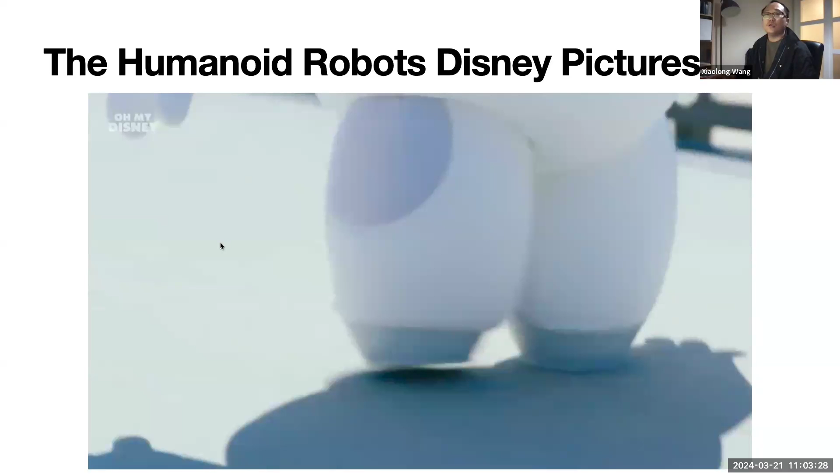I am not a licensed crossing guard, but it is safe to cross. So famous. How did you find me? Probably many years now ago. You hide, I will seek. You also see the movie. It is important to stretch. Before physical activity, I suggest you start with a quick jog.

Let's go. I think as I'm working on these robots, it's really important to have a cute robot, right? Fundamentally, I feel like eventually, if you want to deploy a humanoid robot in society, the biggest obstacle is not really about the techniques. Actually, it's about whether people find it creepy or not. For general people to accept humanoid robots, and for a humanoid robot to basically interact with humans safely and in a friendly way, that's actually a very important aspect.

But looking into what we're emphasizing nowadays, when we try to do humanoids, we have a lot of startups now. For example, the infamous figure startup raised $700 million. If you raise $700 million, it seems it's going to be very serious, and it's doing a lot of serious tasks and doing very well. So this is some upper body control.

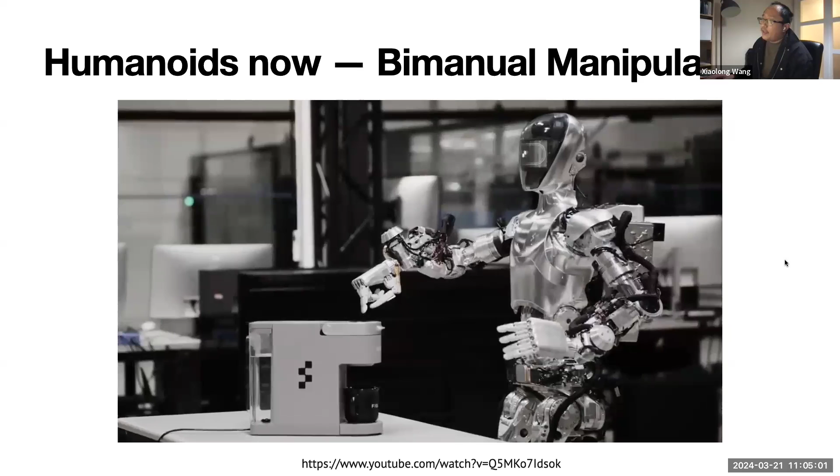And then we have also a lot of work. It has been a long time that people work on bipedal walking, right? So robot running - this is I think Zhongyu's recent work, like running at Berkeley.

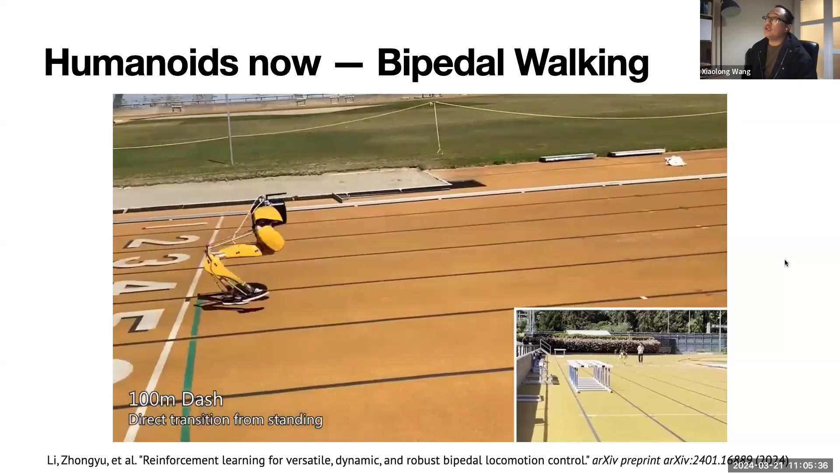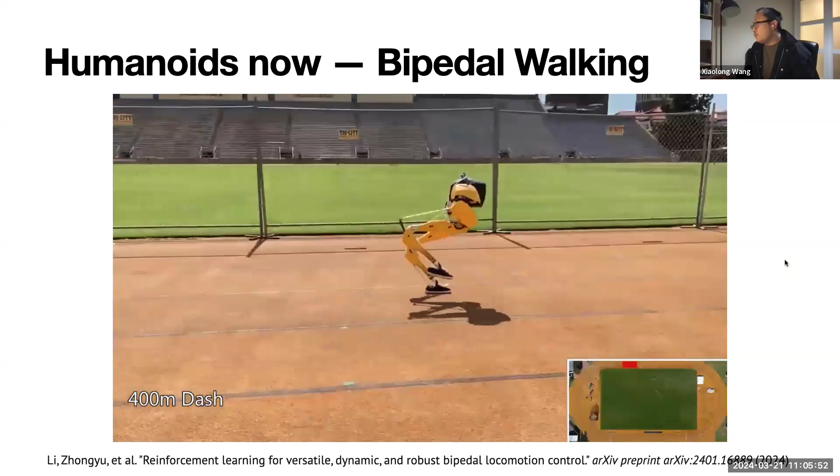So both sides, walking and bimanual manipulation, there's a lot of basically important work. But what we really want to have is maybe eventually a robot that works together with humans. So you need to move and also manipulate with hands, and upper body and lower body need to do things at the same time. So essentially, what this is called is basically whole body control.

I think these are basically the three topics I try to cover today. The first one is whole body control. And our way to do whole body control is not actually emphasizing specifically solving tasks. Instead, we are more focusing on how the robot can express itself. That's why we call it expressive whole body control.

So it would be something that looks like this, right? You have a human that can interact and dance with the robot. This is in our school.

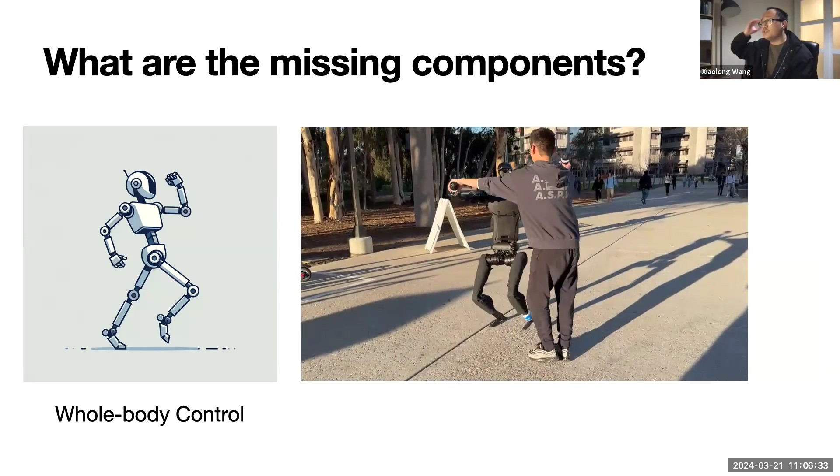Essentially, this work I try to look into is because whenever you have a roboticist and they ask the roboticist to create a robot, the first order is like this robot needs to solve some tasks. But how about can we have a robot that can be friendly and interact with humans, that can express its intention and feelings? This aspect actually has never been considered. So for this work, we basically try to look into a little bit of how the robot can coexist with humans. This is something we are looking into.

And then there's a lot of other technical parts, right? If the robot goes out into the world, you need to perceive the world, and you also need to have touch. So specifically, I would talk about two works. One is how to build good semantic and geometry representations for robots to do mobile manipulation. And then I'm also going to talk a little bit about hands. Hands are something I have been working on for a very long time, maybe 4 years.

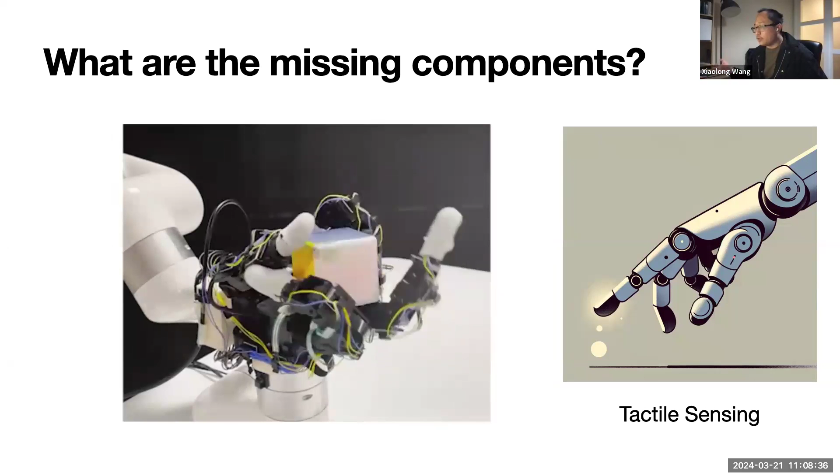It's a very interesting problem because it's essentially what distinguishes humans from animals. I would think that's the biggest difference—whether you know how to use your hands is basically how we are different from animals. And essentially a very important sensor on the hands is tactile sensing. So I'm going to talk a little bit about our in-hand manipulation work, using tactile sensing by feeling the objects, and then we can use the hand to do a lot of cool stuff. That's something I'll try to cover today.

I'll start with whole body control. Like I mentioned before, it's called expressive whole body control because we're really doing something that isn't useful for solving some task per se. It's basically just trying to move like a human and have some fun with humans. So when you look into this work, don't take it too seriously about whether it can solve any problems—just look into it like having fun, like having the robot have fun with humans. Some of you might have seen this video, we posted it everywhere, so I'll show you again.

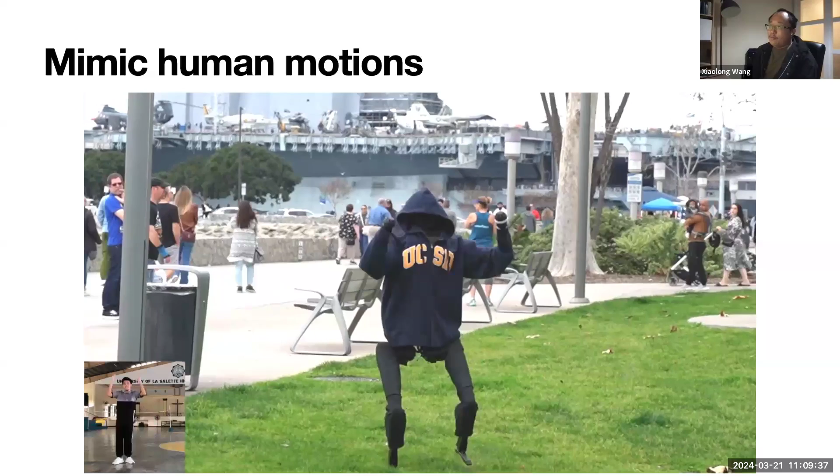Right, so it's following the human motion. But I think you need to wait till the end.

Right, so that's what happened in the end. There's still a lot of work to do, but roughly for 20 to 30 seconds we're able to follow the human's motion. In the end it drifts a little bit away, but it's fine—it's very robust, still walking, not falling down. But we did have a fall once, and it broke the motor, which took 5 days to fix. But this one is okay, it's safe. So the thing we try to do here is essentially enable the robot to follow humans' motion and do things like humans do.

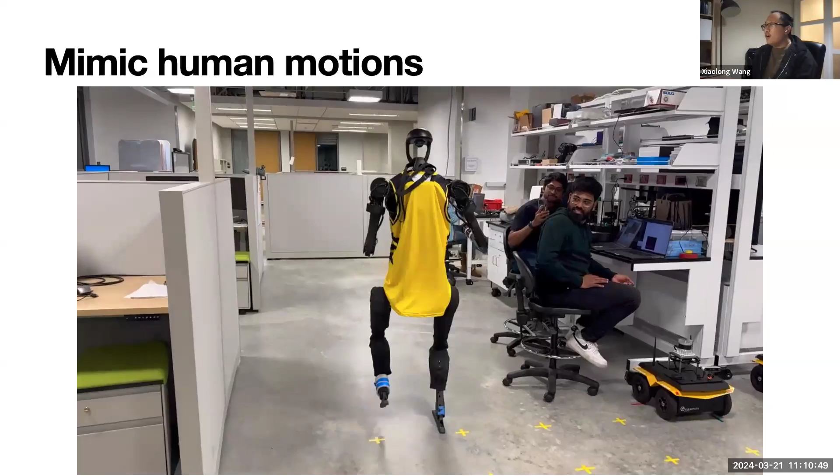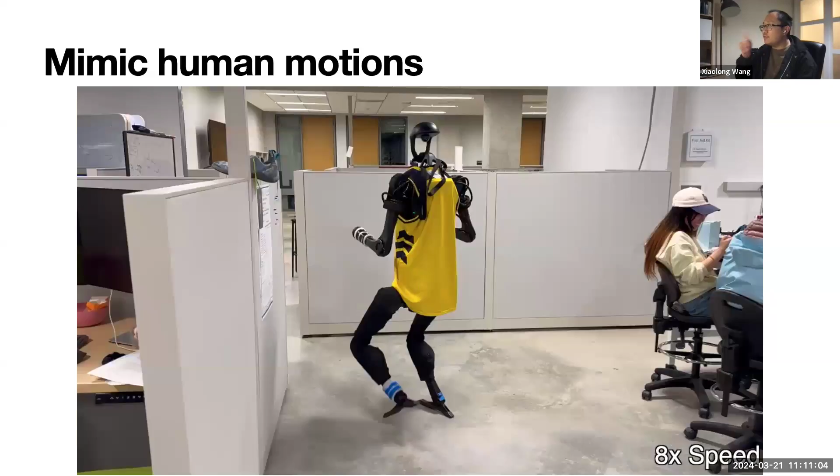So we have the robot that can basically hug you, and we also have the robot that walks around our lab to check if everyone is working. This is the collaborative office at UCSD. We have 7 faculty here, and students are sitting in here. So it's checking if there's anyone—apparently, there's no one.

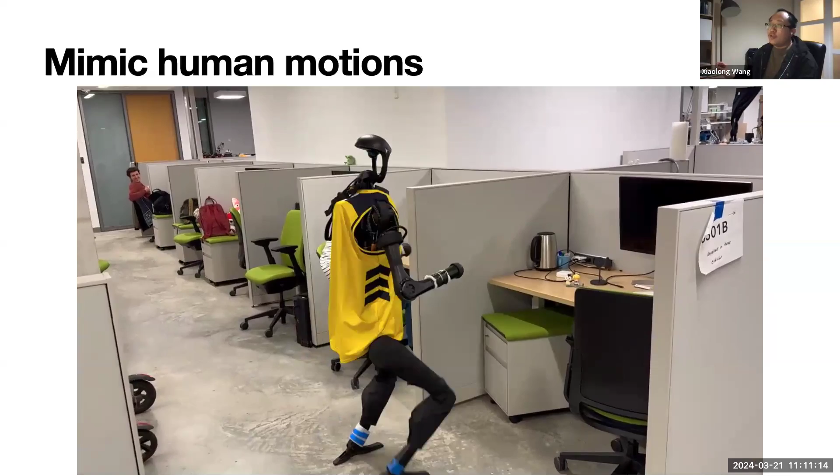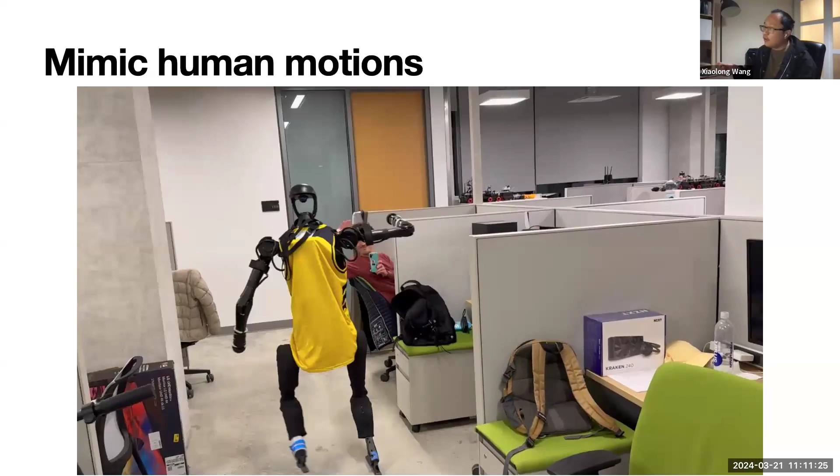So essentially, we do hope the robot has all this capability of waving hands, hugging people, dancing, and all these motions. That's something we enable the robot to do.

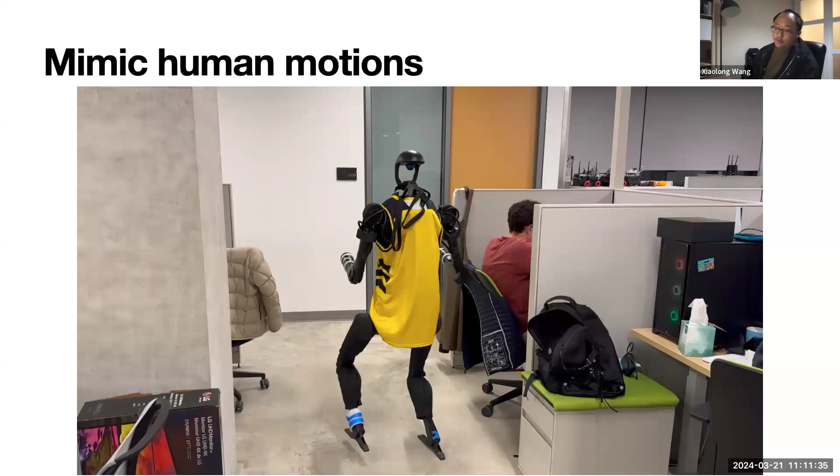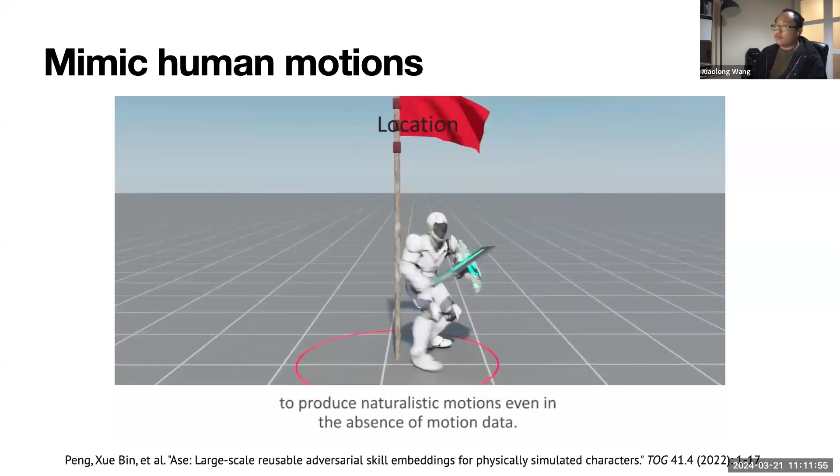So then, is this anything new? If you look into a lot of work like Jason did before—in graphics, in simulation, in all this community—if we play games on PS5, PS4, you already see a lot of very nicely animated robots and very cool robot motions in all these games. So why has it never ever been transferred to the real world? Why is this working so well in sim, but not really working in reality?

The major reason is basically, if you look into the Unitree robots, we spotted out the degree of freedom for each joint. One big reason is essentially that it has much smaller degree of freedom compared to the simulated robot. In simulation, this guy has like 69 degrees of freedom or something, but in our case, we only have 19 degrees of freedom. Currently the robot has this limitation, and it's a good thing or a bad thing at the same time—if you have high degree of freedom, it's hard to control; if you have low degree of freedom, then it's basically very hard to do sim-to-real transfer from the left to the right.

This is just a form of comparison on what we like the PHC and ASE. Pretty sure some of Jason's paper basically shows that the DOF is severely and largely larger than our robot. We are also training our model actually on many locomotion clips, not just a single one, to emphasize our policy is not overfitting to a single trajectory. We are actually training on many trajectories.

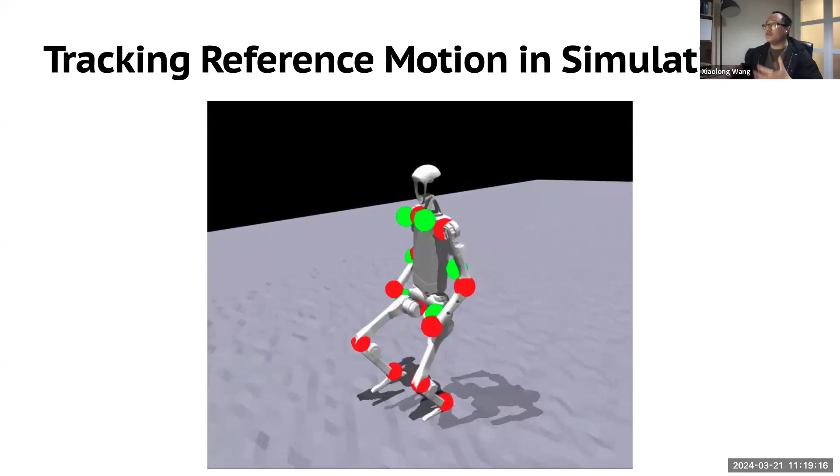So this is an example in simulation. The green dot is basically your reference motion, so this is like a fighting scene. We only do this motion imitation for upper body, so there's no green dot in the lower body. The red dot is basically what is actually happening, so you want the robot to track and follow the reference motions you're given. And that's transferred to the real robot.

So basically, so hitting this guy, there's a waving. This is another example, so you have this robot wave.

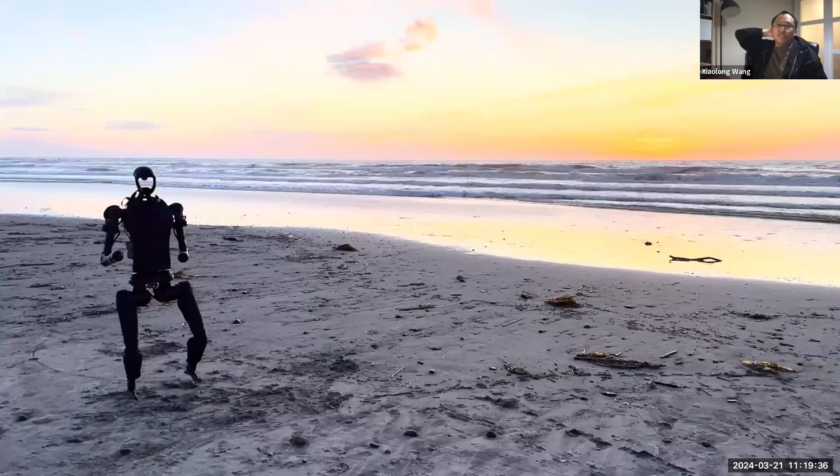And basically, this is what we shoot in the beach. It's important, because we are in San Diego, that the only advantage we have is the beach. So it's important when we have robot work, every work needs to have some demos on the beach. So that is very important.

So these are some examples basically showing the sim-to-real transfer, and you can see the motions basically imitate only the upper body, and the lower body is basically trying to maintain stable.

And there is one thing though, some might notice that it is stepping a lot because essentially the current design of the hardware is still, I feel like there's some non-perfect disadvantage. Basically there's only 1 degree of freedom on the feet. So if you look at your feet now, imagine if you only have 1 degree of freedom, you can only go up and down.

It's very hard to maintain balance when you're standing, but if you have 2 degrees of freedom, you can also do left and right. Just look at my feet now as well. Then basically, you can very easily stand still because you can move a little bit left and right, front and back.

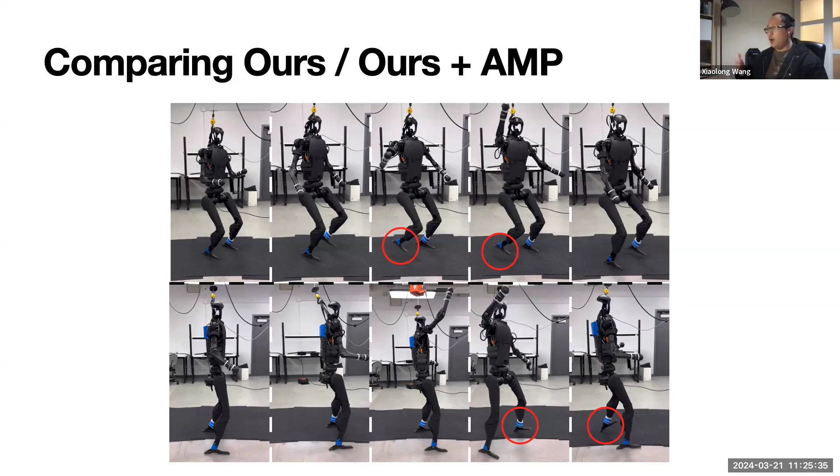So what we call is the foot clearance - whether the foot is lifting up from the floor above the floor some distance. What we find is if you do motion imitation and enforce the leg to also follow the motion, it's not easy - you have less foot clearance. In our case, if we just try to optimize for robust walking, we have better foot clearance, which means walking more stable and better without falling down.

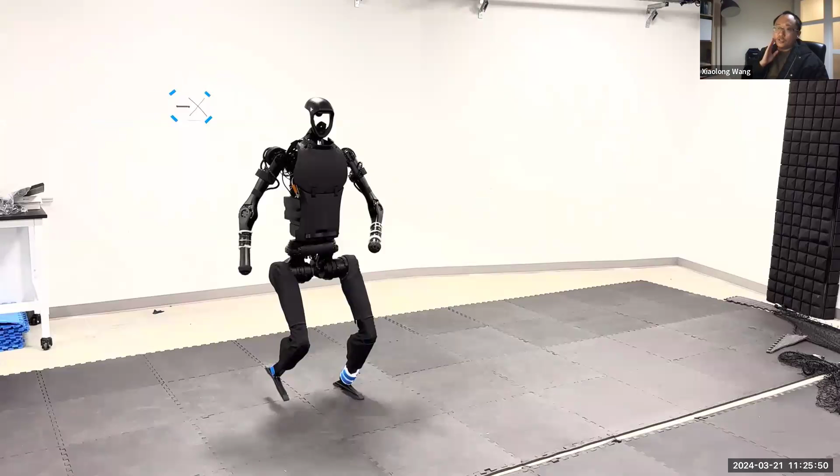So this is work using the lead author's footage, trying to trouble the robot, showing some robustness. And then we have this fighting scene outside the bears of our UCSD, which is a very iconic symbol of the bear in the background.

So basically it's relatively robust. Yandong is trying, also another lead author, trying to push the robot. It's able to, and students seem to be very happy. So essentially the walking is quite robust in these new shoes.

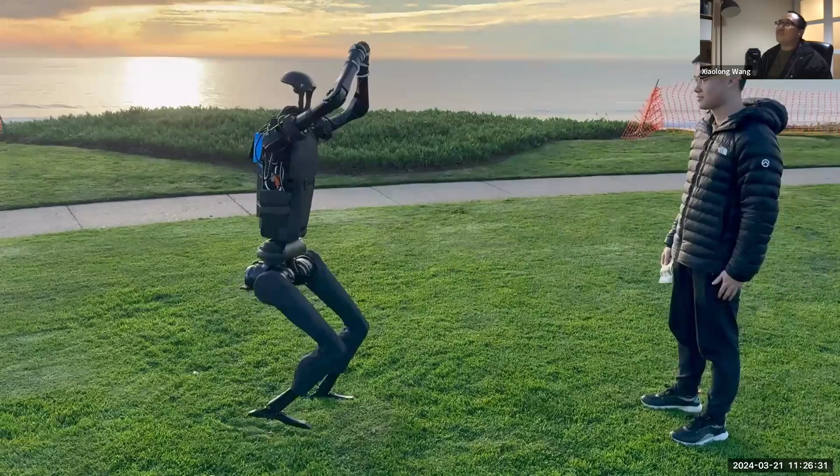So this is a video - I find it very strange, but it's imitating some motion, and then we can high five. I have a very long boring video in here.

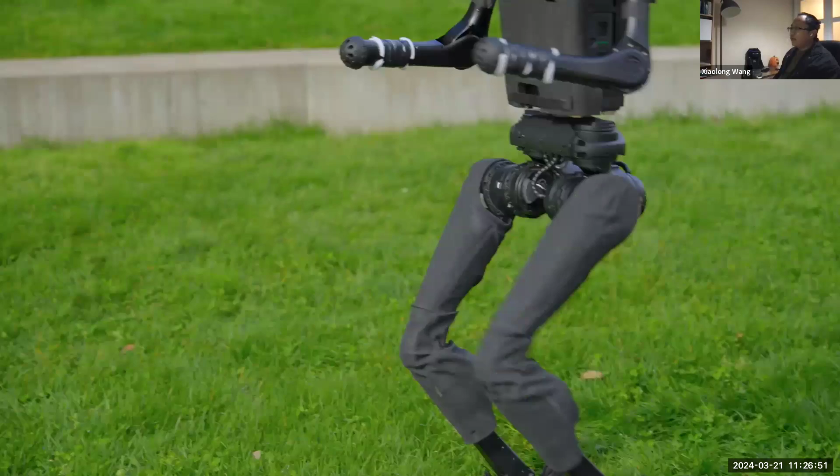So this video is footage on how we do experiments with this humanoid robot. This is just walking, trying to walk in different places. It's a 4 minute walking video.

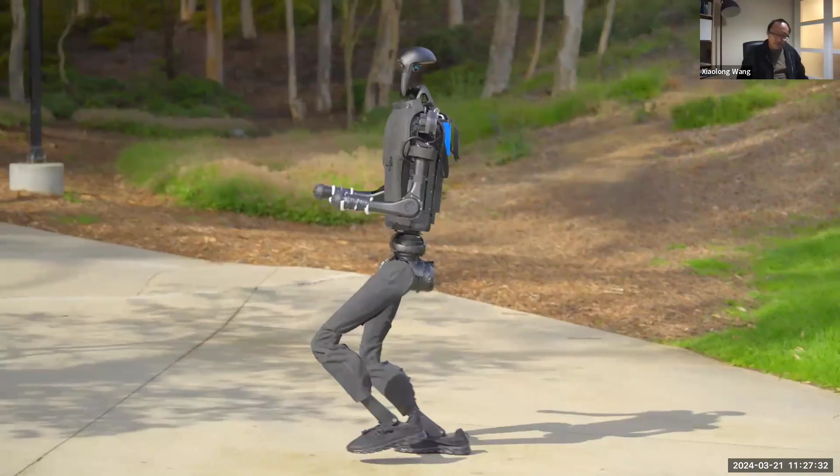So I do want to discuss one thing about working with bipedal robots. If you're talking to a VC or whoever, if you want to open a startup for a robotics company - which is everyone doing nowadays, all my peers are all having a company, this and that - essentially the questions you always get is: why do you want to do legs? Can you just use wheels? Why are legs not practical and not working?

Well, if you walk in places like this - if you want to climb up hills and eventually go in the wild, like very wild, not like going to another person's home, that's not wild, I mean going to climb some mountains is wild - if you do things like that, legs are kind of necessary.

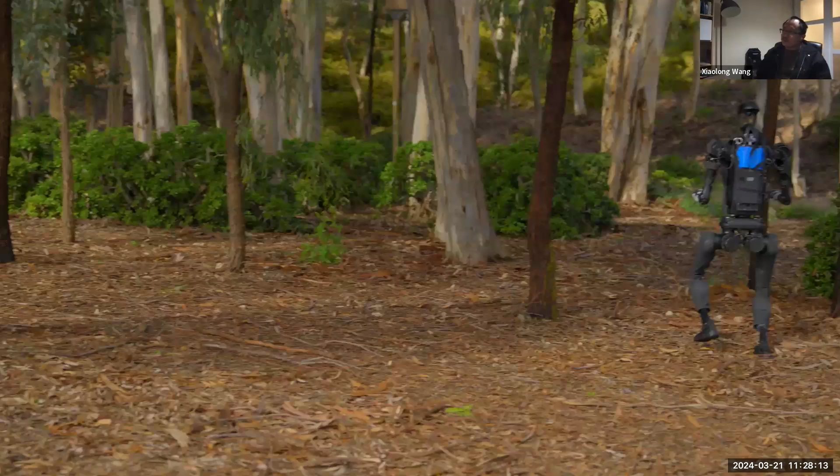And then as a research problem, it's very interesting because our aim in doing work at a university is to try to make impossible things possible. If it's obvious to be solved, then what is the fun? So I do feel like it's a very interesting problem.

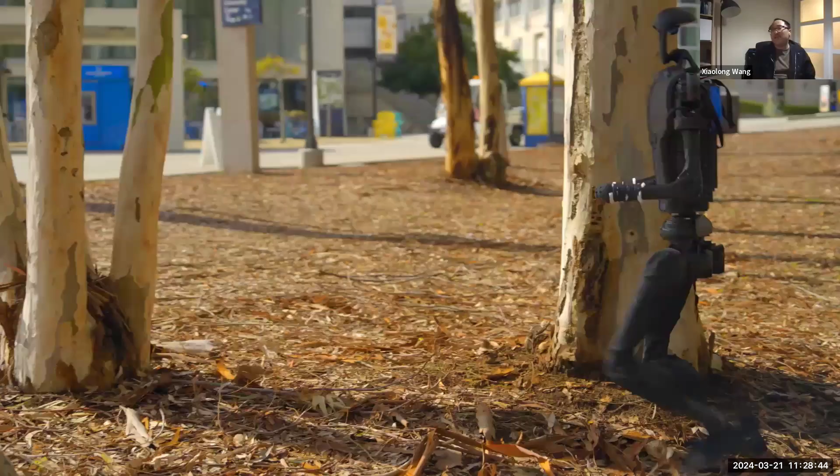I think it will be solved maybe in 1 or 2 years, and once it's solved, everyone will come back and say, oh, why not use legs, why do we use wheels? So until it's solved, it's very, very not obvious. Like 10 years ago when we did self-supervised learning, everyone said it's impossible to do better than image classification pre-training. Now everyone says, oh yeah, we should do self-supervised learning. I think things will go like that for humanoids too.

Similar, right. Now we have some footage - Xuxin went to UTC and had some fun there. We basically demo outside mostly, so the robot blends quite well into the crowd.

I have a lot of fun working on this project. If you want to do a project, why not have some fun with it? I think this is something that students enjoy. There's a lot of hardware engineering, training, sim-to-real, whatever, but eventually if you're able to show the robot walk out into the world and interact with people, and then go to the beach, that's a lot of fun.

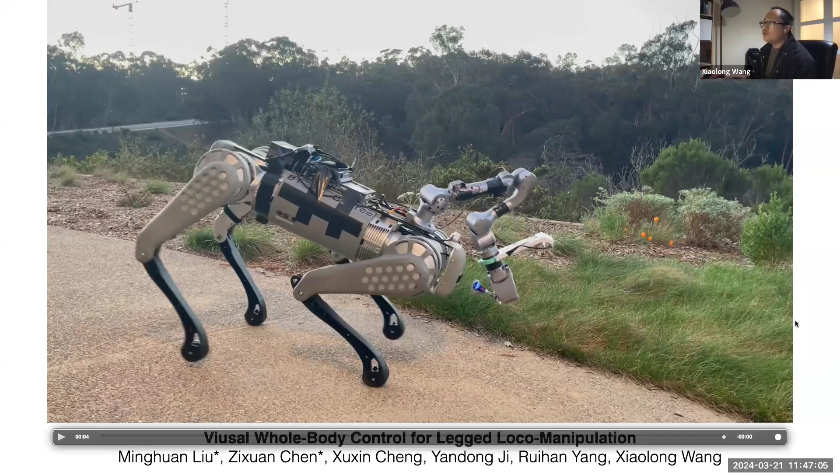So now I think a very interesting project is to work on this robot. This task is very interesting because you actually try to move your leg and arm at the same time to achieve some task.

So it's also vision based, it's autonomous, all things are autonomous. We have 2 cameras, one on the gripper, one on the head. So this is a RealSense. Apparently there are better RealSense cameras now, we should try those out. We have actually tried 4 or 5 cameras for this.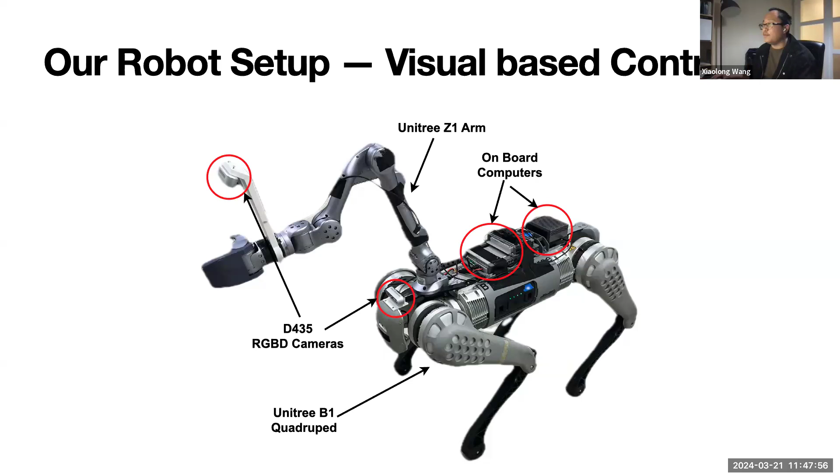Some are on the arm. Right now we are trying 6 or 7. So there's a lot of things you need to do on selection of cameras. But anyways, this project is fun.

It's also following the same philosophy, that you try to train a low-level policy to do the tracking. So what you're seeing here is you're specifying, you have a manual or other policy to specify the yellow point, right? So you train a low-level policy so your end effector, your gripper, will follow the yellow point. So you basically control your whole body.

As long as your gripper is getting to the yellow point, that is good, okay? So you can move your arm up or down, but at the same time you can bend, right? So legs and arms move at the same time. No matter how it moves, there might be multiple solutions, but the goal is to do tracking, track the end effector, track the gripper. So that's essentially what the control policy is learning here.

So once you have a tracker, that's the same with humanoids, right? If you have a low-level policy that can track things, then you only need another policy to tell the low-level policy what to track. So now you have a low-level policy that learns to do this tracking, to put your gripper into the yellow location. You can move your leg or your gripper at the same time, it doesn't matter. Then you basically train another thing.

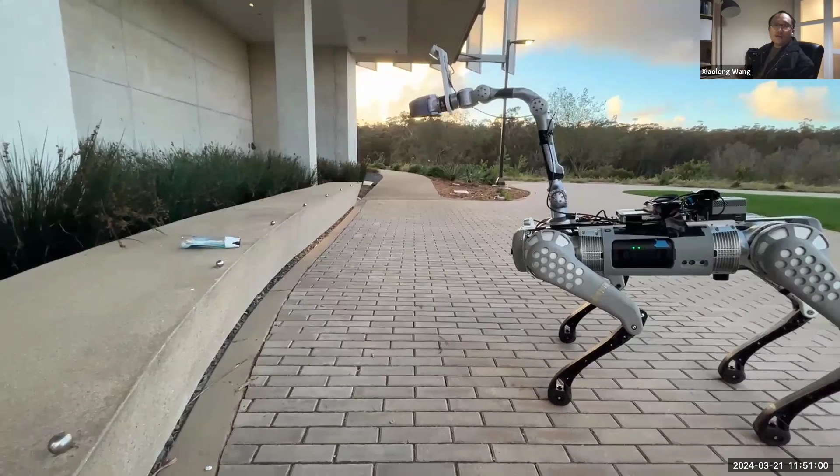So that's following the same philosophy we use for the humanoid, but the humanoid part is all doing low-level things. So we train on a lot of objects and try it out in the wild. I think I'm not sure how much time I have, but I'd like to show you basically.

So this is able to do this—oops, it falls in the end. But we could basically pick up multiple objects. Maybe I'll just show one object here.

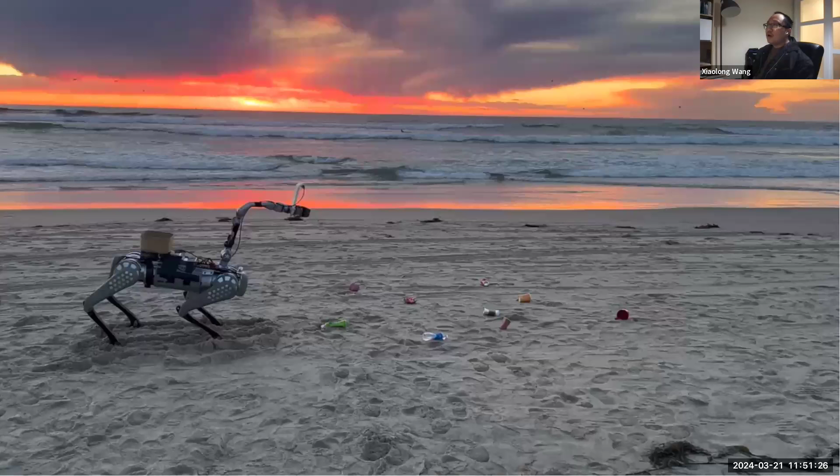So we have to go back to the beach again—sorry, but I need to show the beach again. I think it's just such a beautiful, peaceful scene, but there's some trash on the beach. We have the robot pick up all the trash. Imagine after all the people went home and left some trash there, you still have the robot to help you pick it up.

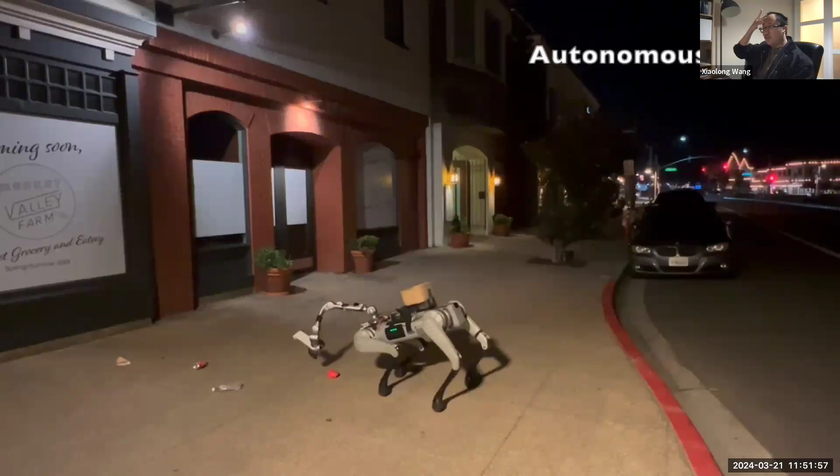So I'm showing this consecutively. We did some editing because the whole video is actually 5 minutes, but I need to show it within a minute. Something good about training with RL is that it learns to retry. You can see it try to cross and grab, it's not successful, and it just keeps trying.

And then, just give me some patience—in the middle the robot stops, so someone fixes it, but we are able to collect all the things in the end. So this guy is trying very hard. The gripper design has a bit of a problem; if you're curious what the problems are, we can share later, but we're not happy with the gripper design. Still, this guy is working very hard to clean up everything on the ground.

So the RL gives the function of retrying. Because in training in simulation, you also fail a lot of times, but then you need to regrasp to get success. Essentially, RL helps you learn to do retrying as well. So, not sure what will happen, it just takes some time, but finally you get all the objects.

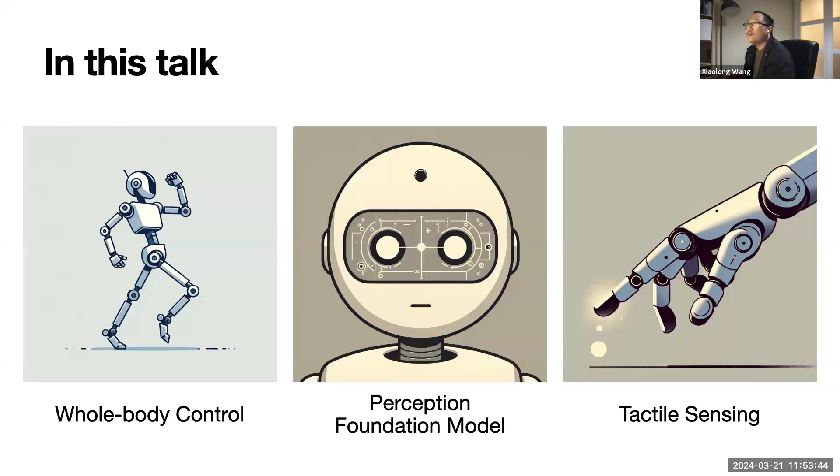Yeah, this gripper we need to change. Right, so basically that's that. I think I actually took most of the time, so let me quickly go through two more things, and then I'll be happy to answer more questions.

Like I said, we spent a lot of money, 50K, on this legged robot, so we want to have at least a few more projects with it. I saw a lot of questions—I'll answer them later.

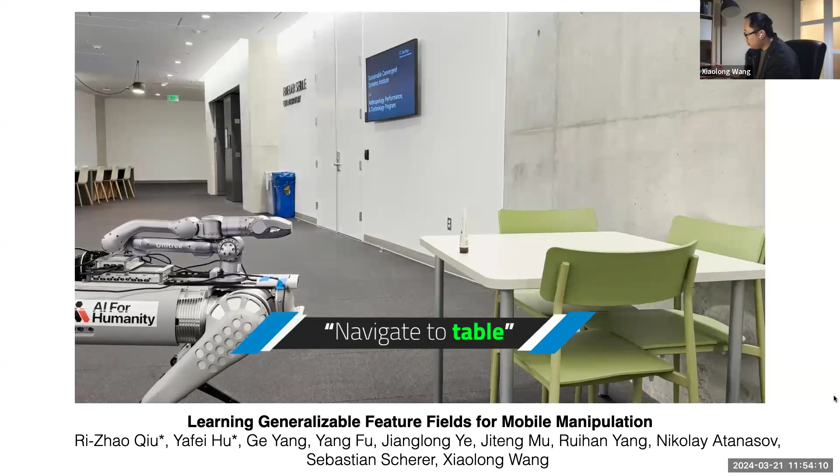Now we have vision language models, so this is what we like: having the robot do something following language instructions. This is more like a mobile manipulation thing—go to the table and grasp the objects, this sort of thing.

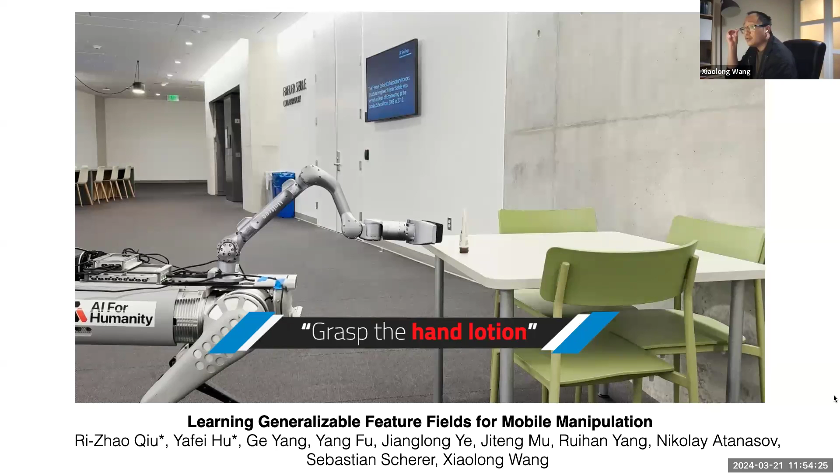I think one thing that's very interesting about this work is that we're doing a new kind of 3D plus semantic representation. I've been pushing the direction of generalizable neural radiance fields for a while. The idea is that especially for tasks like this, you need geometry understanding of the scene, and also semantic understanding, because you ask the robot to follow human instructions.

I'll skip a lot of details of what we do, but we train a generalizable NeRF that not only does reconstruction and view synthesis, but also renders vision language features. So you learn a 3D plus semantic representation, and we use this representation to do open vocabulary navigation and grasping.

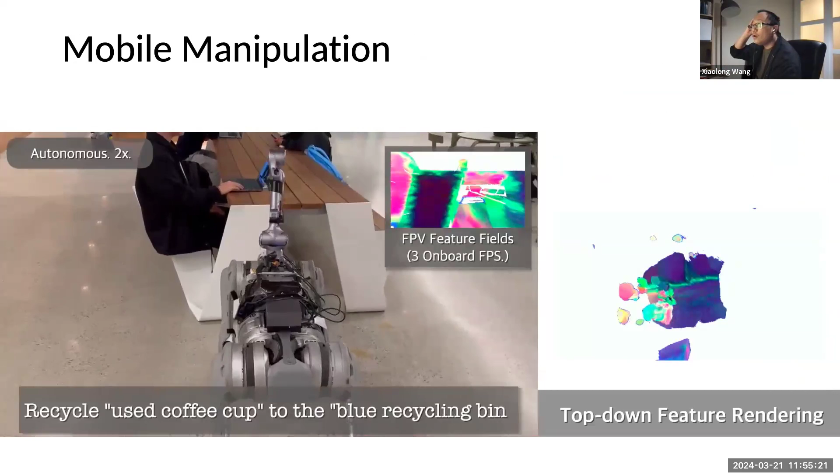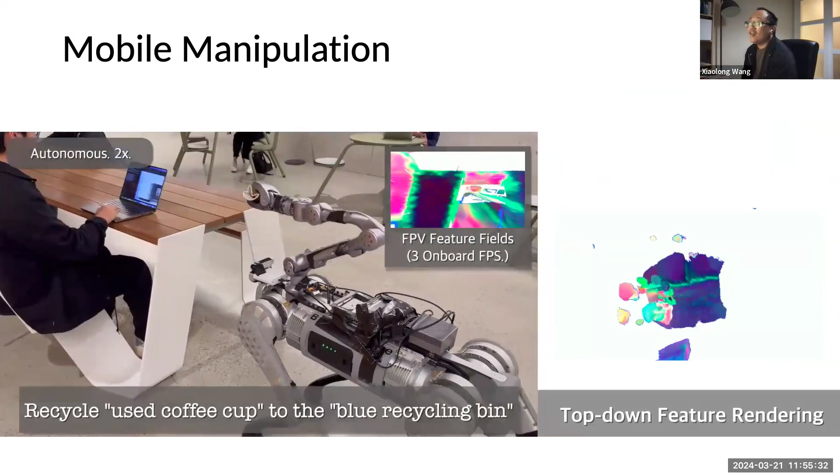This is some visualization, a PCA of the feature space. This video shows Roger, who is pretending to look at cat pictures somehow—I don't know why he does that. But this is the guy in the black t-shirt, my student.

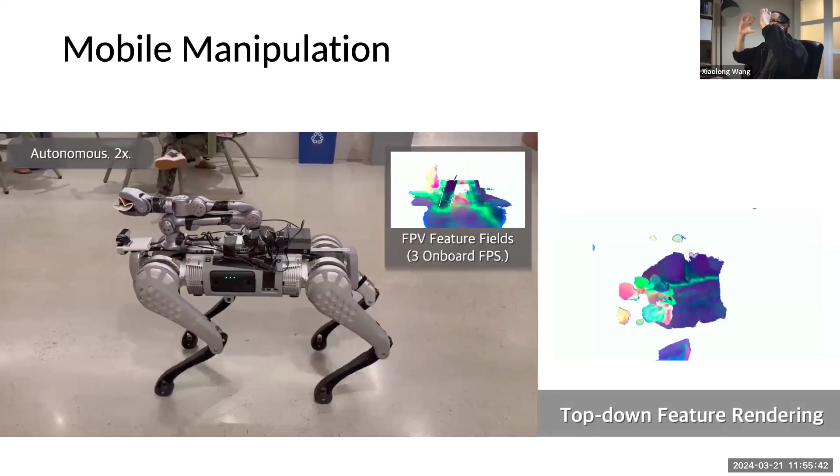So this robot is autonomous. There's a first-person view with a PCA feature of what you see, and on the right is actually building the map, which is a semantic map. Essentially, the color represents the PCA of the feature space.

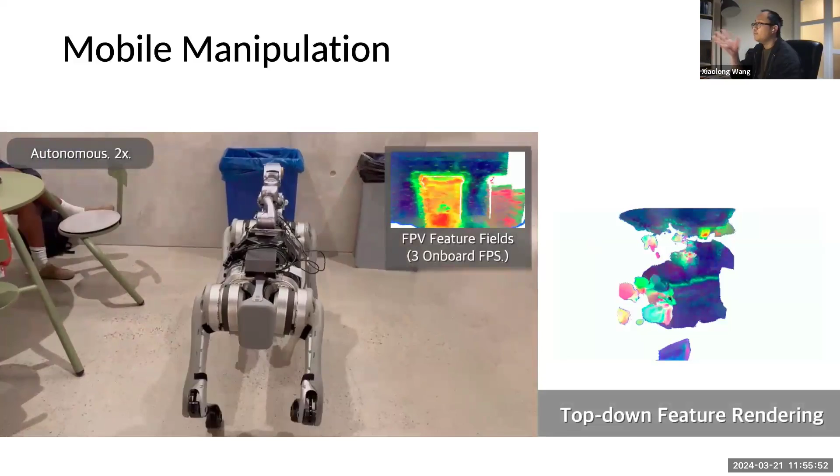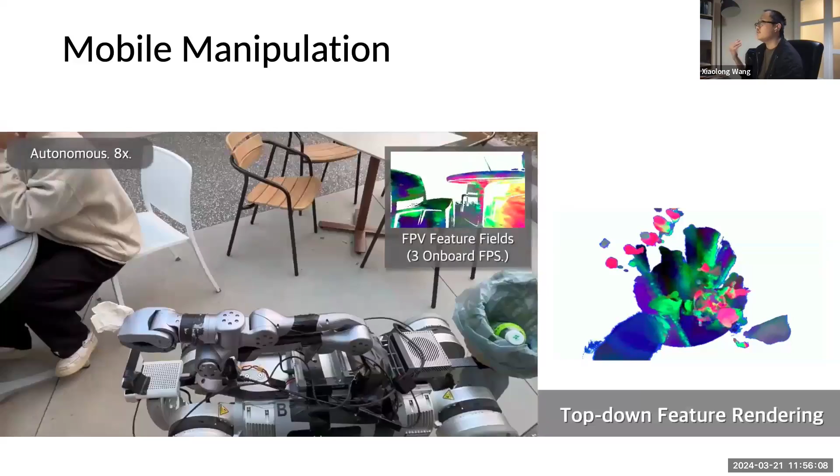So it's like this generalizable NeRF—you can basically get reconstruction by doing a feed forward. You get the features by doing one feed forward, so you're able to get the geometry and also the vision language model features attached to the 3D space just by doing a simple feed forward. On the right is a top-down view of your feature view, so it's growing and building the map in real time.

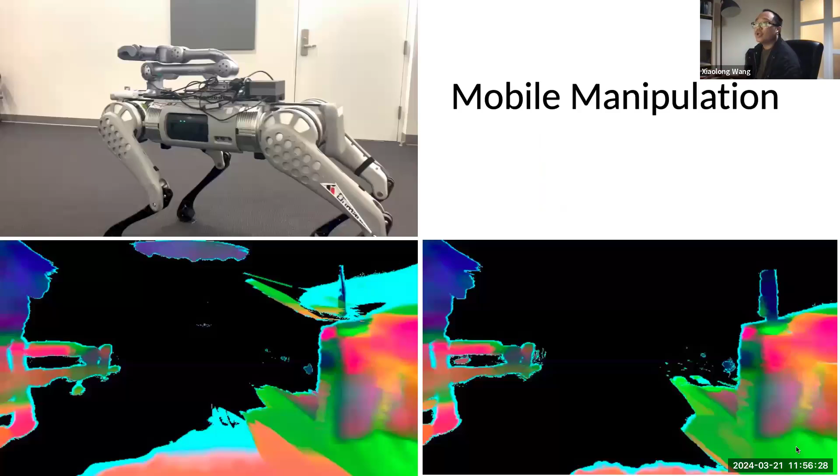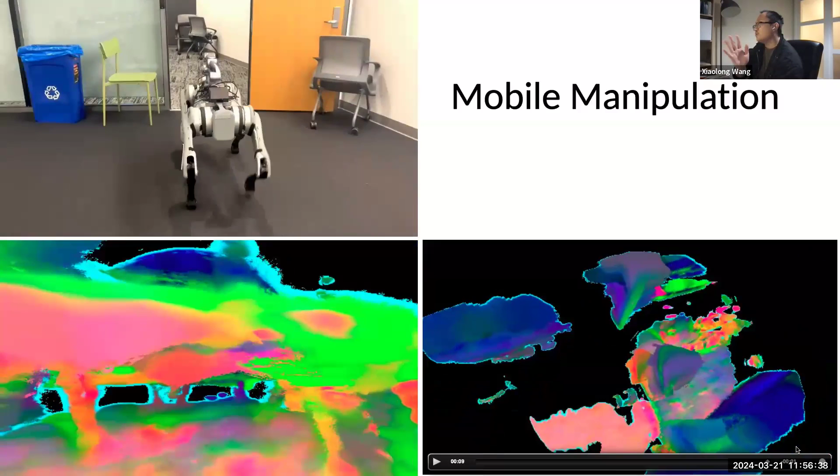This is another example. I'm sorry that the speed on the bottom is a little faster than the speed on the top, but essentially I try to show first-person view on the left, top-down view on the right. Basically, you're building this feature field, feature nerf, in real time to not only capture objects when you look close up, but also the scene representation.

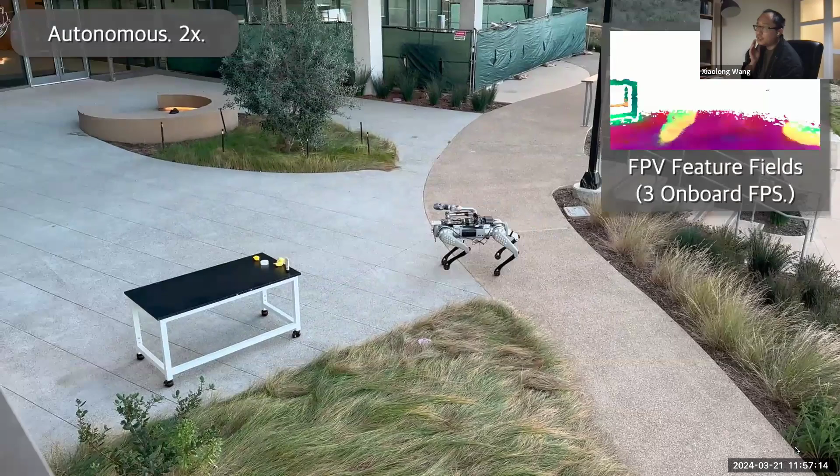The good thing about capturing scene representation is you can ask the robot, don't walk on the grass, don't step on the lawn, and pick up the toy duck. So you can do some planning to avoid parts of the scene, and then go to your target objects. We use the duck a lot. We liked our duck a lot.

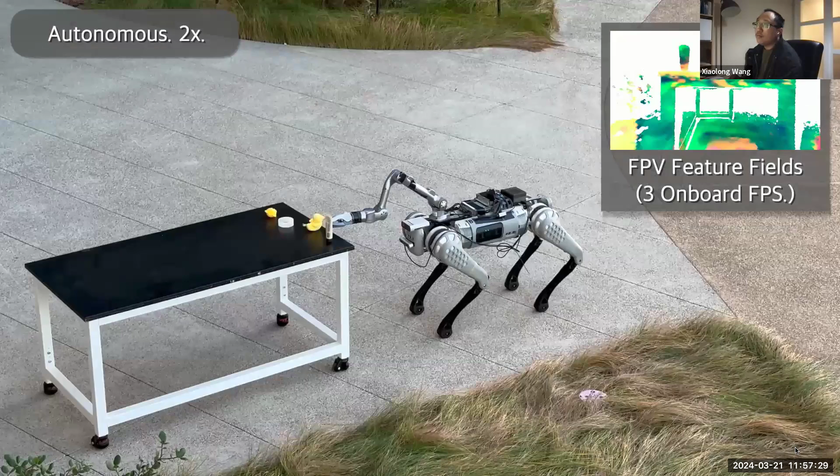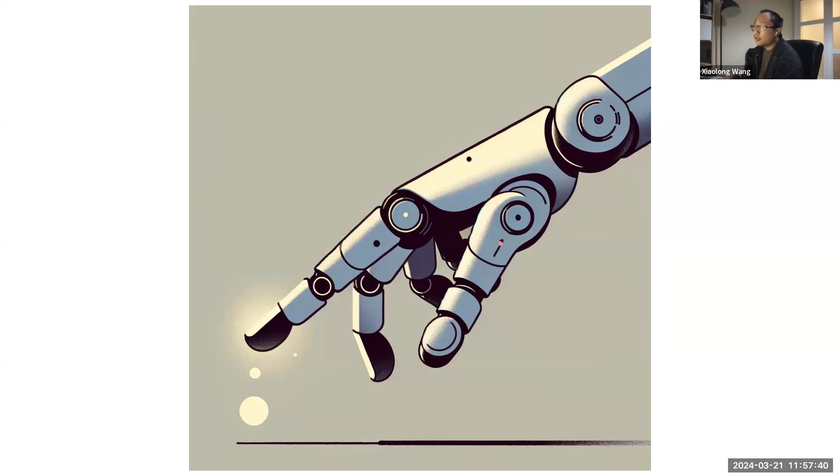So this is the vision part. Now I want to finally talk about our touch part. This is a work that I like a lot, in terms of it being more like a co-design of hardware and also learning. From the vision perspective, the hand is so important again.

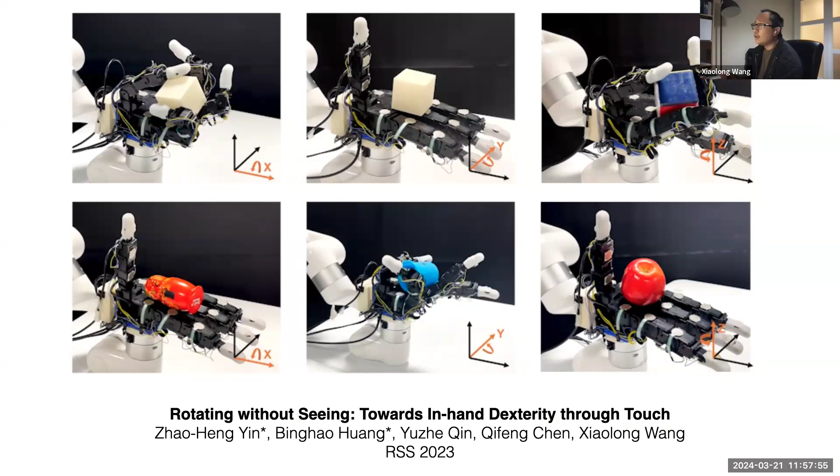Two years ago, actually four years ago, when we started working on hand things, that was with Ilija, when Ilija was still a fresh PhD student at Berkeley. We have this state-only imitation learning paper from around 2020. We were doing a lot of work on hands, but at that time, hands were still a problem that's very hard because it's high degree of freedom.

People used to wonder, why should we do hands? Why don't we do a gripper? But after four or five years now, everyone is doing hands. There are maybe 10 companies now making hands. It's crazy.

The thing about hands is, in general, if you do it right, you can provide more robust grasping. Imagine grasping a bottle: using a parallel gripper is very unstable, but grasping with a hand is very stable.

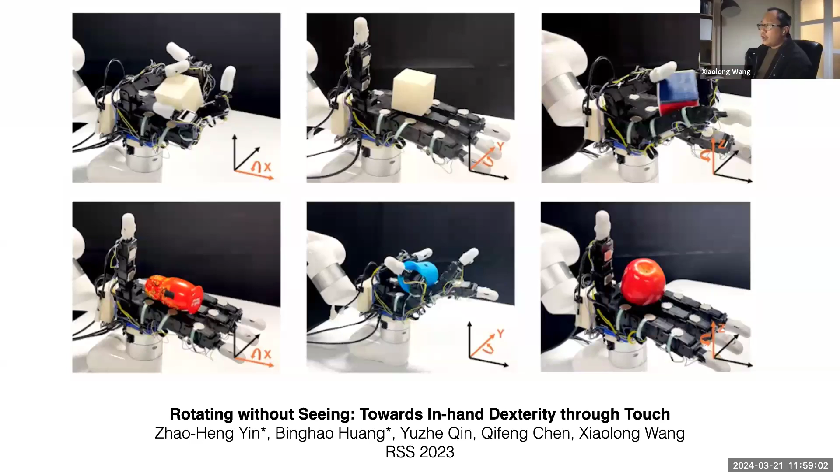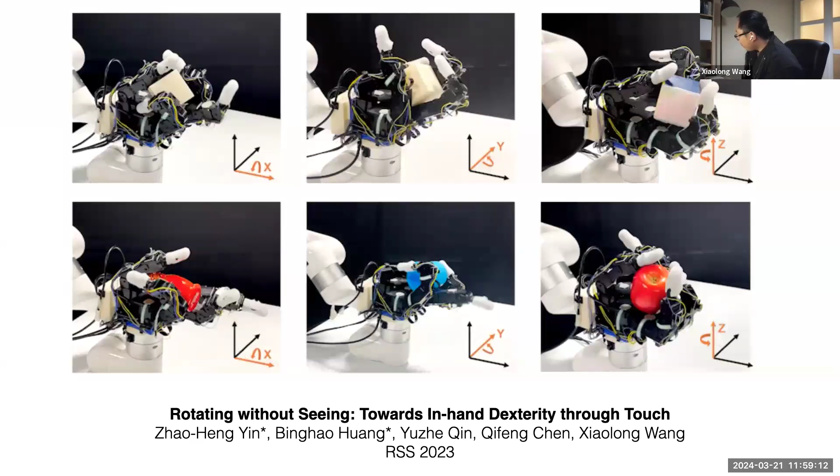Cool things about hands we like to do also include in-hand manipulation. This is a work where we try to rotate objects in hand without using vision. It's an interesting project for me because it explicitly says no computer vision, zero computer vision. Can you use touch to do anything, to do everything?

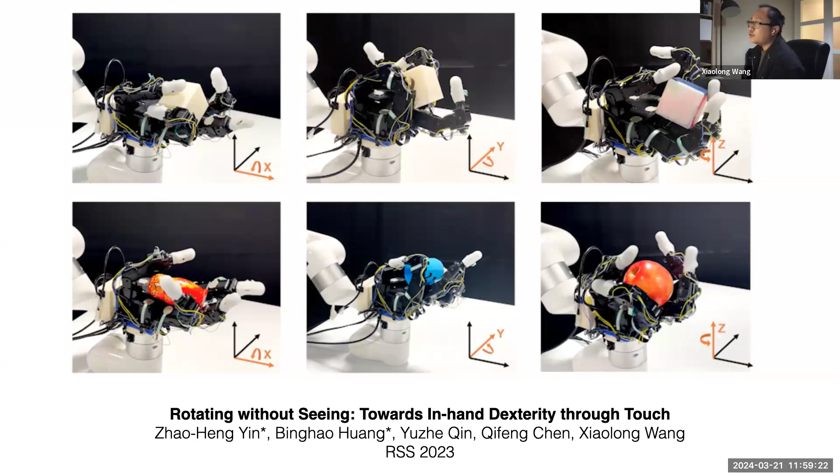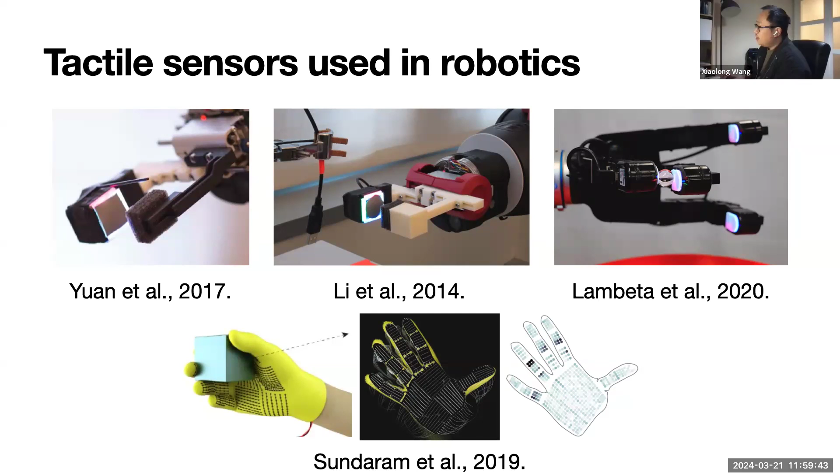There's been a lot of advancement, like from Adelson's lab, with Digit from Facebook, and also a glove from Adelson's lab. In the touch sensing community, people are very obsessed with capturing texture. That's been strange to me, because I feel like even the mere sense of touch can tell you a lot. But people study gel-based sensors, which are soft material that deforms when touched, and the deformation gives you touch information.

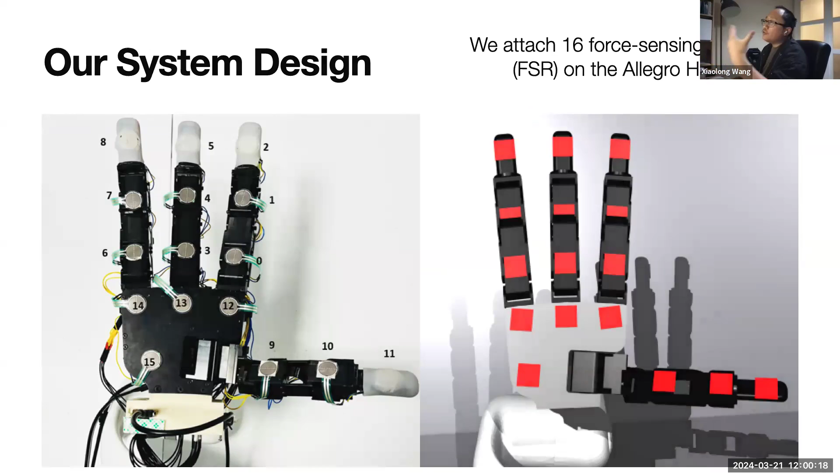What we're proposing is actually on the very extreme end. Instead of modeling detailed textures of the object you touch, we do something very different: a very simple sensor, but placed all over the hand. We use an FSR sensor, force sensing the normal force, and each piece is very cheap, about $12. To make it even simpler, we make the sensor binary.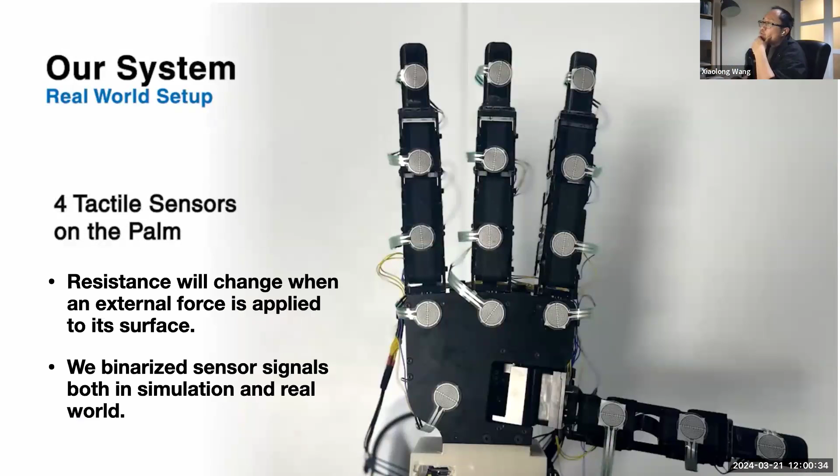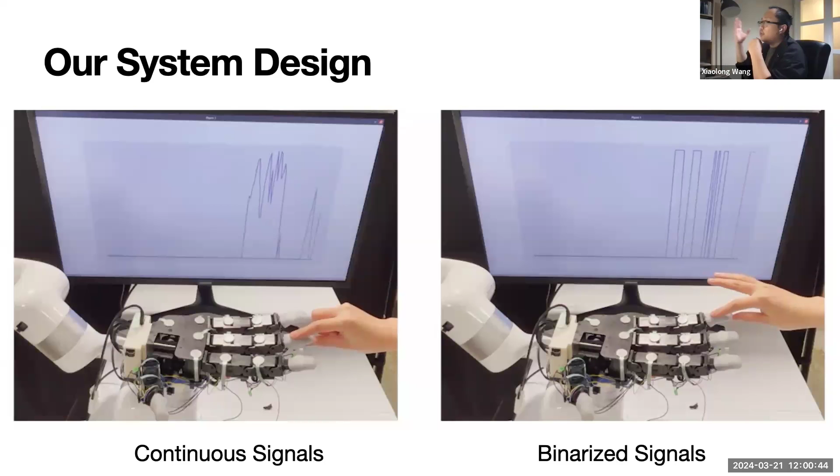So it's all geometry. If everything becomes geometry, sim-to-real will be very easy. The real problem with soft sensors, like the tactile sensing we used before, is that simulation does not work because the soft material mechanism is very complicated. Modeling deformation in simulation is very hard, and very hard to do sim-to-real transfer. But here, you simplify the sensor, which means you simplify the sim-to-real process.

The hope is that even if the sensors are very simple, if you have a lot of them, you can still capture the information of the object. You can think of it as having a very simple mechanical design, but then using learning to do in-painting of the rest.

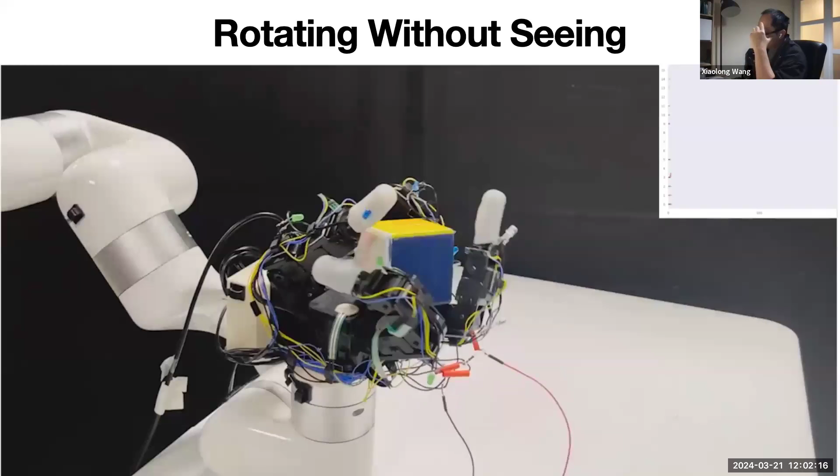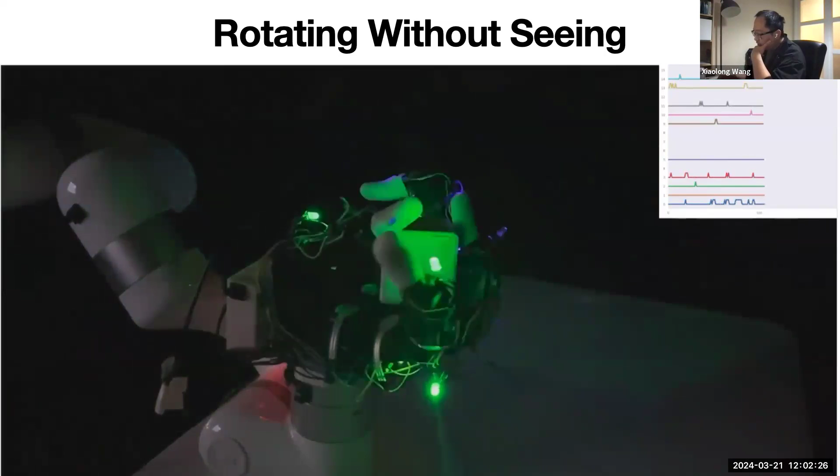So what I'm essentially proposing is, here's an example to transfer to the real world. You can rotate objects even without vision in the dark. It's fine to have very little signal because, for example, think about MAE: you only have a few patches, but you can recover the whole image.

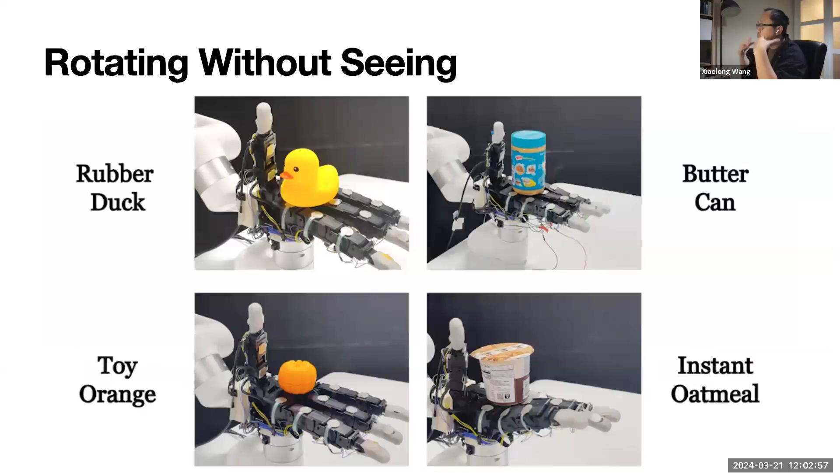It's basically the same philosophy here. You can have very simple sensor signals but use learning. You train on a lot of data, exploit billions of data points in simulation, and that data helps you in-paint the whole picture. So you don't need a lot of information - you can train with a simple sensor but still rotate objects in the real world and generalize to different objects. That is the in-painting in hardware.

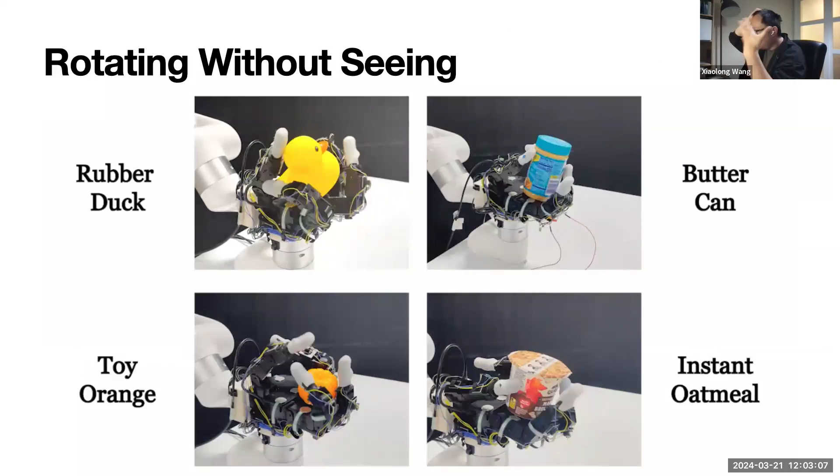This is rotating around the z-axis. There's also the y-axis and different axes we're trying to rotate.

Fundamentally, I like this work because the design philosophy here is that when you're doing mechanical design - we have a student doing mechanical design - the fundamental mistake people make is trying to make the mechanics too good, too perfect. You don't actually need to push it to the extreme, as perfect as it could be. Maybe it doesn't need to be that perfect - you can just use learning to in-paint the rest of the parts.

So coming to the next 2-3 years, I do think a very big thing in robotics is good co-design of hardware and learning. As you design hardware, you need to think about how it applies to learning - which parts are useful, which are not. You have to consider machine learning when doing mechanical design. You cannot wait for Unitree to build robots and then build software on top - when designing the robot, you need to consider learning from the start.

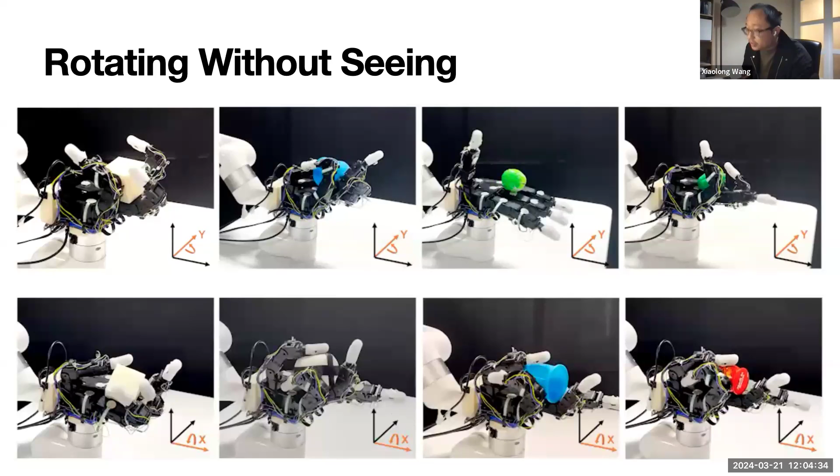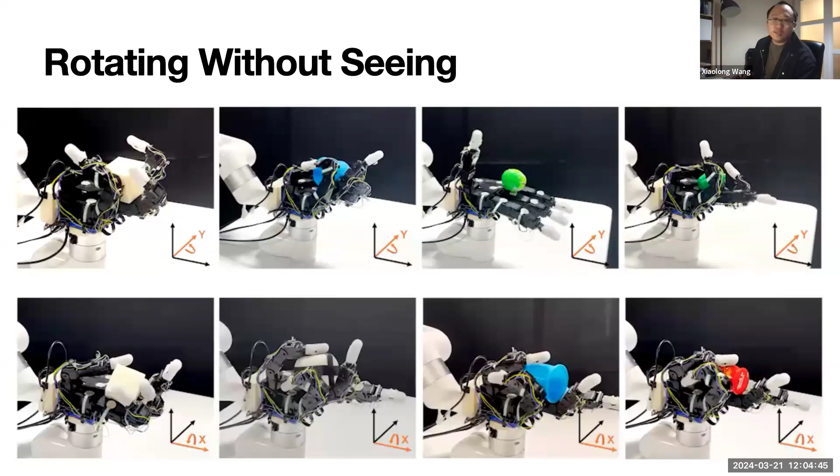That's something we try to push a lot in our lab. Now we're doing a lot of mechanical design - that's basically this part: whole body touch and vision. I'm a little over time, but I think these are 3 important elements to make humanoids work, and it's accumulating.

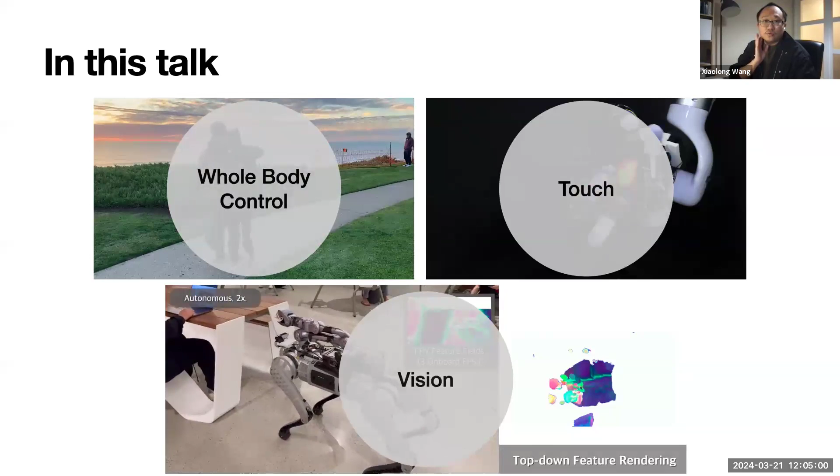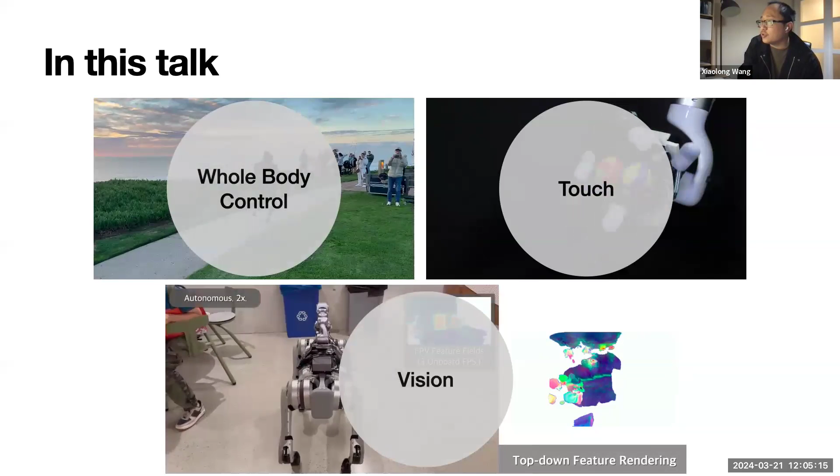Question: Is there any empirical experience for selecting the joints for training? We don't select the joints - we control all the joints. There's no selection in the humanoids; every joint is controlled using RL.

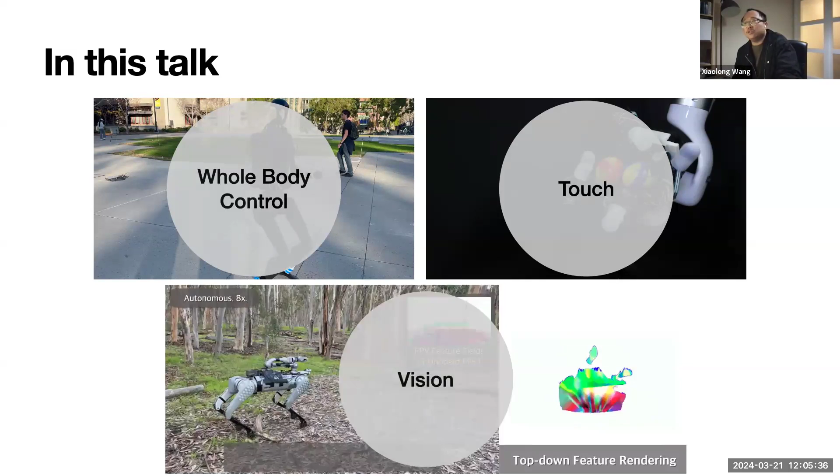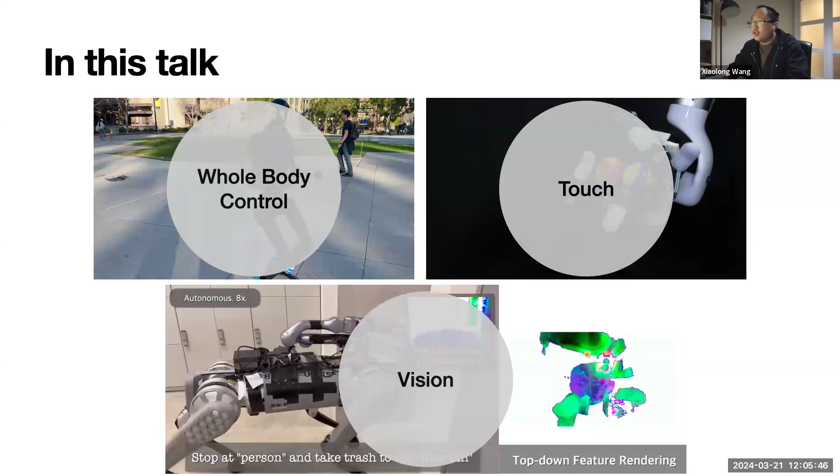Question: Is all the training data collected from the real world, or does part of it come from simulation? It depends on the project. The first and last projects are all simulation - there's no real world data, except motion capture, like the CMU mocap dataset, which is very famous. I guess that's what your lab should know very well - it's a motion capture dataset. You do a lot more work than CMU does nowadays. So motion capture is very important.

Now I'm happy to answer more questions - just let me know. I'm a little bit over time.